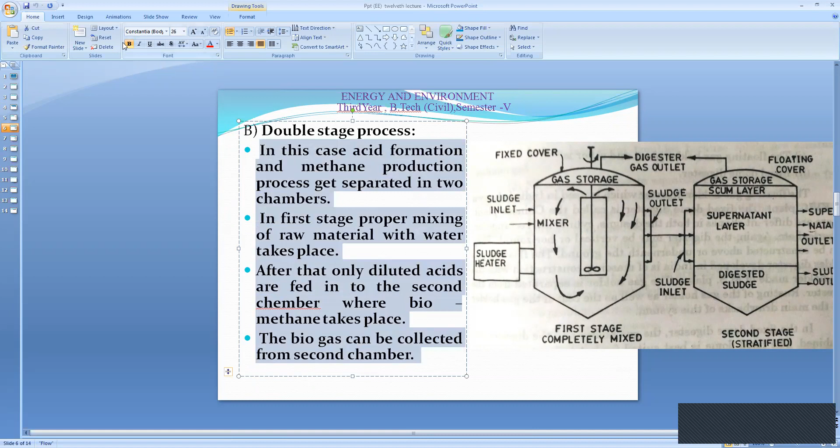In this lecture, we will see the remaining three factors which affect the biogas digestion: toxicity, pressure, and acid accumulation inside the digester. After completing these factors, let us go for the classification of the biogas plant. There are three types of classification, which we will discuss later in this lecture. First is the continuous as well as the batch type classification of biogas plant, and in that there are two types of digestion process considered under that digestion system. Let us see in detail.

Let us start from the remaining factors: toxicity, pressure, and acid accumulation. What is meant by toxicity? If we maintain the digested slurry beyond the limit into the digester, then it becomes more difficult to digest such raw material by the colony of anaerobic bacteria. So there is a formation of toxic, extra doses of elements like calcium, magnesium, and potassium, and due to this they kill the microorganism structure of that bacteria, producing a bad effect on the fermentation process.

Due to this extra utilization of the raw material into the digester, the fermentation process gets reduced. Calcium, magnesium, and potassium are elements required for gas production, these are the three points effective in carrying out gas production in plenty amount. But due to the excessive concentration of calcium, magnesium, and potassium, the bacteria will get killed, and ultimately the production rate decreases.

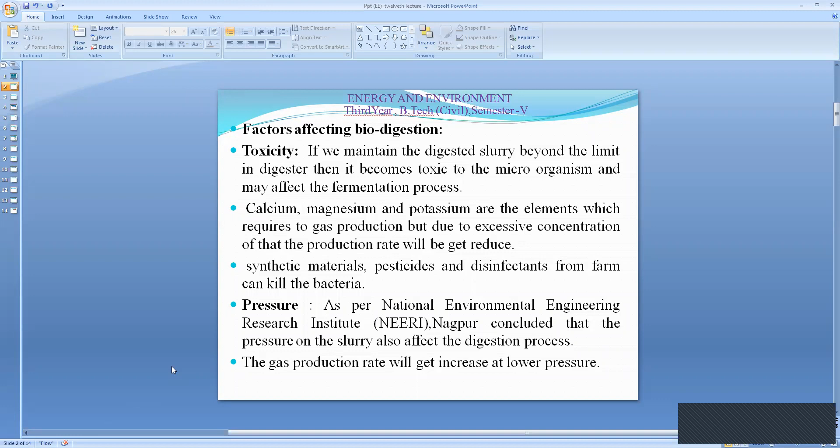Then the next point, or the last factor, is the acid accumulation inside the digester. As we already seen in the second phase of the digestion system, there is production of acid of organic matter.

As we learned in the previous lecture, there are three types of stages. In that, the second stage is the acid formation of organic matter by using anaerobic digestion. So there is a formation of acid in the second phase of the anaerobic digestion system, which causes or decreases the pH value of that slurry, or digested slurry.

This will happen when fresh feed material, or the feed, is poured in large amounts. Due to the excess feeding of fresh raw organic material in large amounts, there is creation of acid in plenty, and due to this the pH value will get decreased. When the pH value goes less than 7, such slurry becomes acidic in nature. We already know that.

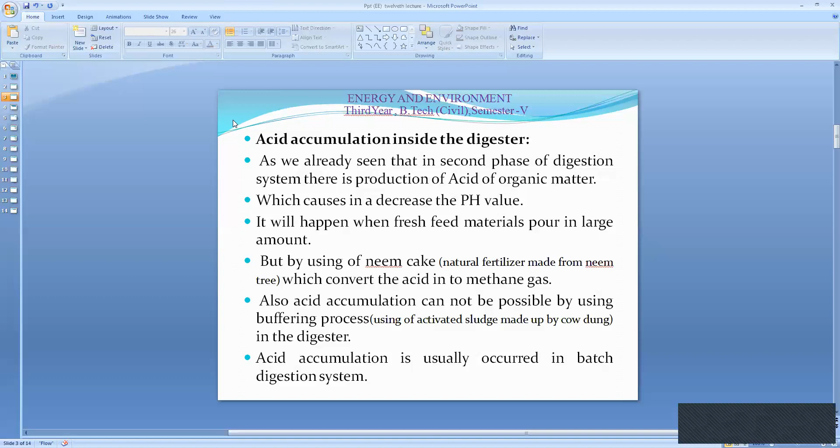The first point is that there are 15 factors with respect to the pH value of that organic slurry, up to the acid accumulation property into the digester. We have to consider these 15 factors which affect biogas production. After that, let us see the classification, or the types of occurrence, in the biogas plant.

With the help of this PPT, let me show the classification of the biogas plant. There are three types of classification led by researchers with respect to the anaerobic digestion process. The first one is continuous and batch type biogas plant. Then dome and drum type, with respect to the physical concern - this is the second type. With respect to the process concern, this is the first type, known as continuous as well as batch type anaerobic digestion.

Then with respect to the physical concern, the dome as well as drum type is the second classification. After that, the different variations in the drum type is the third classification we have to consider in our discussion. So let us see the first classification of the biogas plant, which is the continuous and batch type.

In this lecture, let us discuss the continuous processed plant. What is meant by this? In this plant, there is a single digester where raw material gets charged regularly. Such continuous type biogas plant is utilized with respect to domestic purposes or waste coming from the farm. So in terms of small scale, we can use the continuous type of biogas plant, and in that there is only a single digester where raw material gets charged.

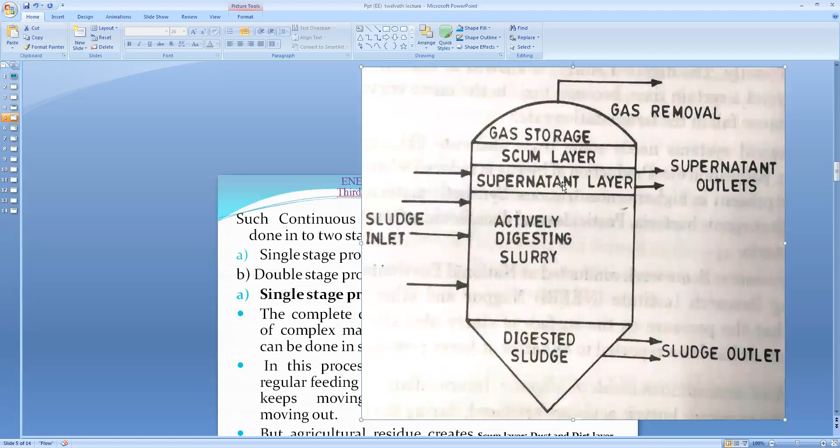In that figure we can see there is an inlet, and after that inlet there is proper mixing with respect to the inlet as well as the outlet, a proper arrangement in the digester system. After the inletting of the sludge, during the proper mixing, five types of contents are created: one, two, three, four, five. Which are the five types?

Let us see. The first outcome is the digested sludge. When there is an excess amount of digested sludge, we can draw it out through the sludge outlet. Then, while carrying out effective anaerobic digestion, the second element is known as the actively digesting slurry. This is the main concern, and with it there is the production of gas.

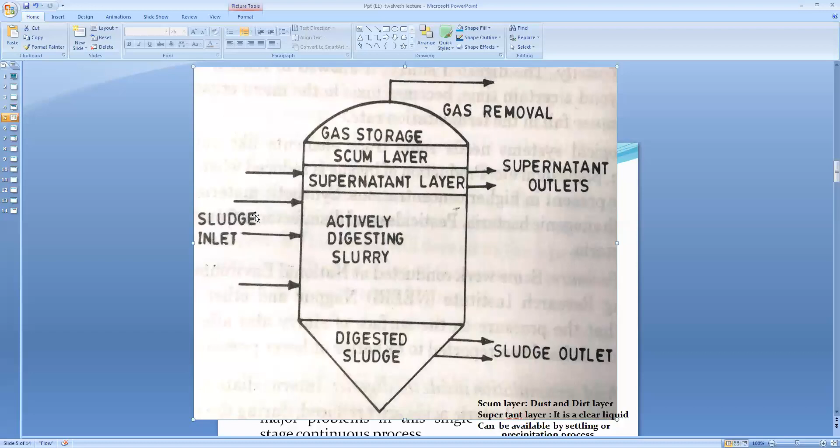As we use the raw material, it contains dirt and dust, and this dirt and dust will get separated after the proper mixing of the raw material in the digestion tank. With that proper mixing, digestion occurs, as I show in this PPT. After proper digestion, separation occurs in the form of the scum layer and the supernatant layer. So this figure gives the clarification of the single stage process.

So let us see what is meant by the single stage process. To complete the digestion process, digesting the complex matter into biogas, the process occurs in a single chamber only. In this process there is a need for regular feeding, as well as regularly moving out the residue. So it is necessary to feed the digestion tank regularly, and to move out the residues, meaning undigested waste etc., regularly. This is one of the important points in the single stage process: we have to keep regularity for the input as well as the output.

Okay, but the agricultural residues create the major problems in this single continuous process. So please avoid agricultural residue as a raw material. If you want to use agricultural residue, then you have to utilize the double stage process for gas production. And as I said, there are five types of elements that get created.

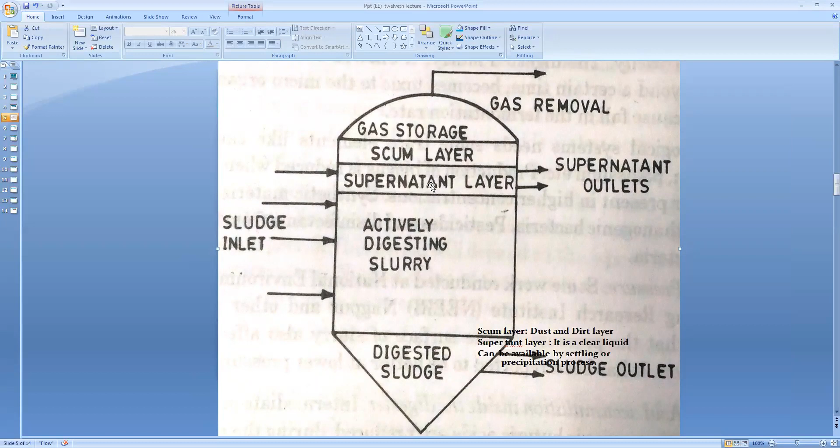One is digested sludge, meaning the excess sludge we can move out from this type of outlet. After that, the main process: active digesting slurry is kept in this portion. After that, two types of waste get created, known as the scum layer and the supernatant layer. After that there is the production of the gas. This is a very important point we have to consider.

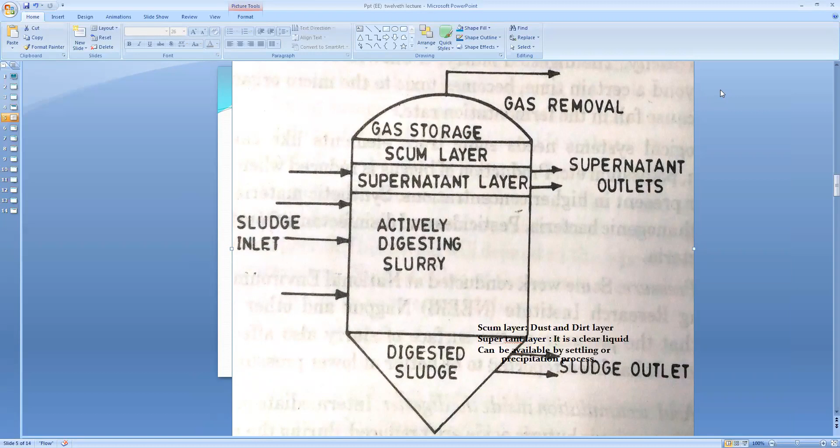Again, the gas production occurs in this single digester tank, and we have to collect and store the accumulated gas in the upper portion of this tank, and utilize it for energy purposes, for producing energy. Okay. So what is meant by the scum layer, and what is meant by the supernatant layer? Let's see here.

The scum layer is nothing but the layer containing dust as well as dirt. It gets separated after digestion occurs using anaerobic digestion, or anaerobic bacteria. Okay. And what is the supernatant layer? It is nothing but the clear liquid which is available by settling out or by the precipitation process. Such liquid contains bacteria, obviously.

So it is nothing but the clear liquid available after settling or after carrying out the precipitation process in the digestion tank. So according to our requirement, we can move out the supernatant layer as well as the scum layer, as shown in this figure. The next process is the double stage process.

Okay. In this process, let's see the figure first and then we will discuss. In this figure we can see there are two drums, there is a sludge heater, and there are sludge as well as supernatant outlets. There are figure number 1 and figure number 2. In figure number 1 there is the inlet, and through this inlet the raw material comes into digestion tank number 1.

In digestion tank number 1 there is proper mixing or stirring using a propeller, a water fan we can say, or something like a turbine. Using this type of propeller we can carry out the mixing properly. After proper mixing, we allow the slurry in the form of activated sludge into the second tank, where the production of the gas occurs. Okay.

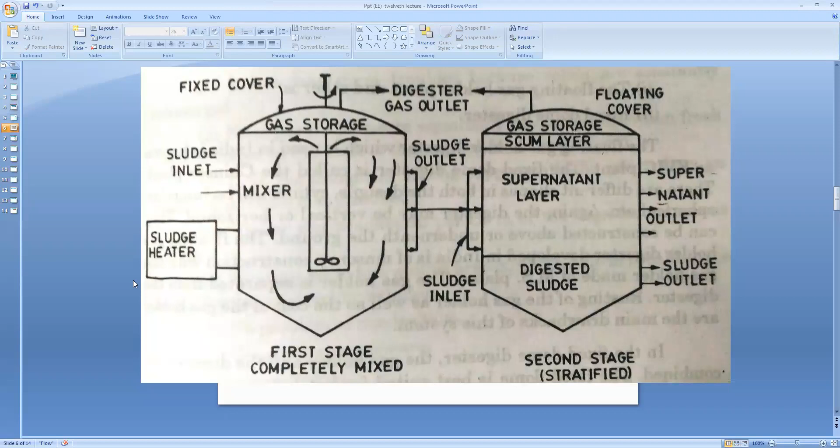So let's go into detail on the double stage process. In this case, the acid formation and methane production processes are separated into two chambers. As we said, proper mixing occurs in tank number 1, and gas production occurs in tank number 2. When we carry out proper mixing, agitation and stirring, we can form the acid very well. After acid formation, we allow methane gas to be produced properly in tank number 2.

So in the first stage, proper mixing of raw material with water takes place using this propeller, and as per the temperature needs, we take the help of the sludge heater, as shown in this figure, indicated by the cursor. Okay. After completing the first stage, we move to the digestion of that raw material with the anaerobic digestion system.

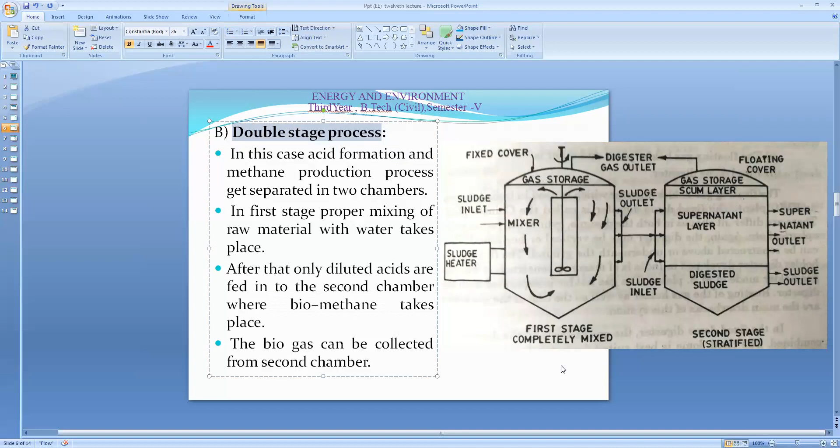in the double stage process, we also have to consider some features of it. Before considering those features, let me explain one point: in this type of double stage process, we can solve the problem created by feeding fibrous plant waste material into the digester. So there are five types of raw material we can use very well.

First one is cow dung or buffalo dung. Second one is night soil, which is nothing but human waste. Third one is the waste from poultry farms, and fourth one is pig waste. Fifth one is the raw material available from organic matter, which is called plant waste.

So this double stage continuous process can solve the problem generated by the fibrous plant waste material, as there is quite a difficulty, or a lot of time is required, for fibrous plant waste digestion using the anaerobic digestion process. Such problems can be solved by using the double stage process.

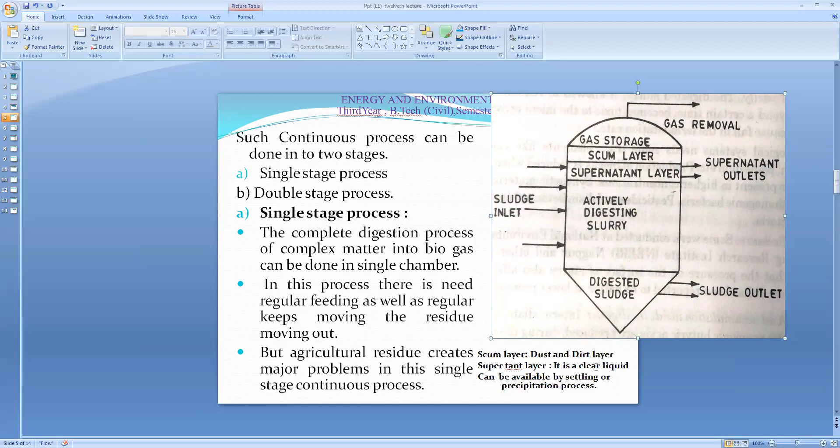For that, a comparatively bigger tank is required, and to avoid this, the double stage process requires two digestion chamber tanks that are comparatively smaller in size than the previous one. And it needs less time for digestion, as proper mixing, stirring or agitation happens in tank number one of this double stage process.

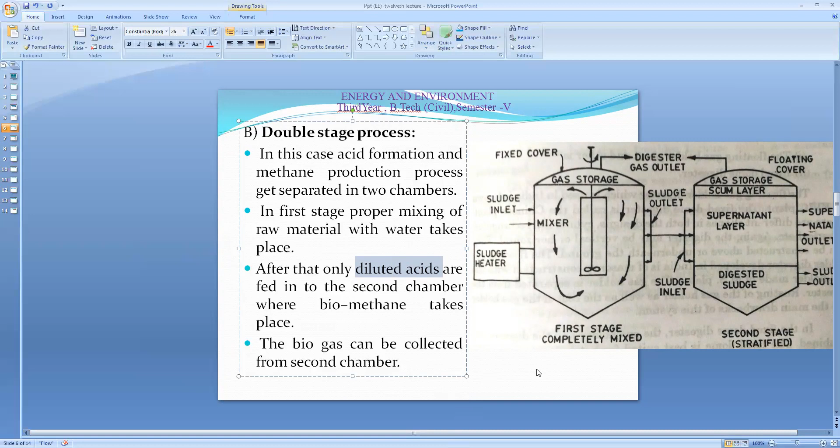So only the diluted acid is allowed to feed into the second chamber, and only the screened acid becomes available in tank number two. So the rate of production automatically increases using anaerobic digestion. So ultimately less time is needed for the digestion process.

Okay, and the last point is that it is easier in operation, meaning for handling purposes it is quite easy, and fewer problems are generated in the double stage process as compared to the batch type of plant.

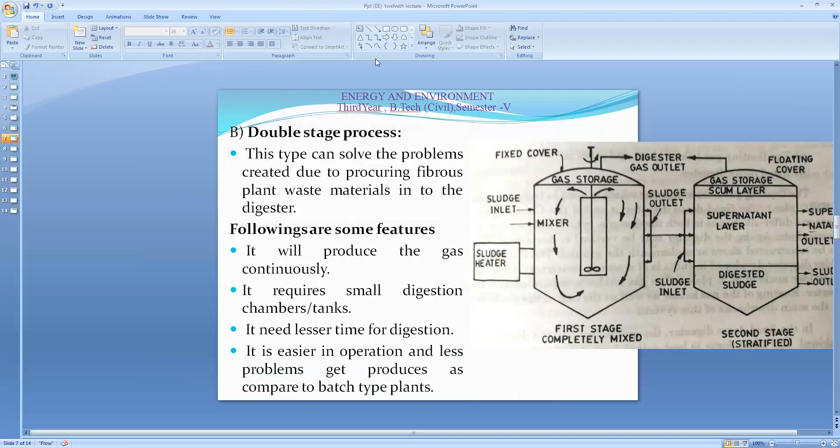So this is one of the classifications we had to discuss, and let us stop here. After that we will go to the next classification with respect to the drum, known as the dome as well as the drum type, and a small discussion remains with respect to the batch type process. Let us see in the next lecture.